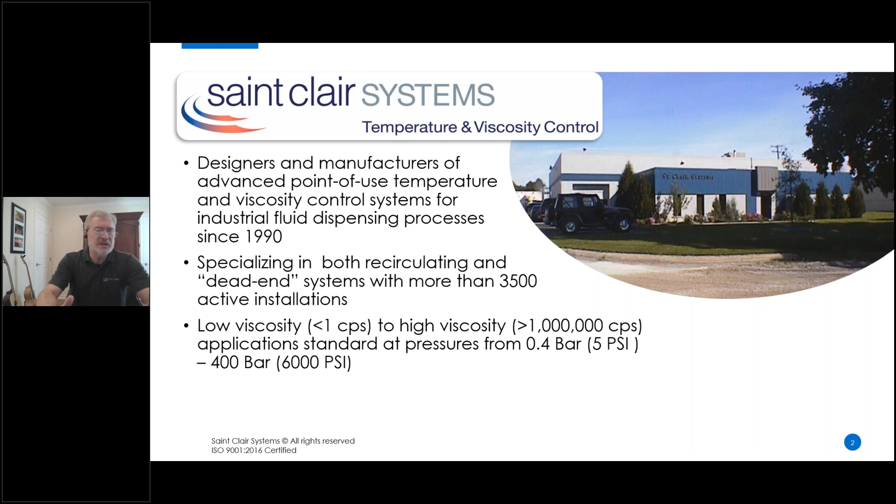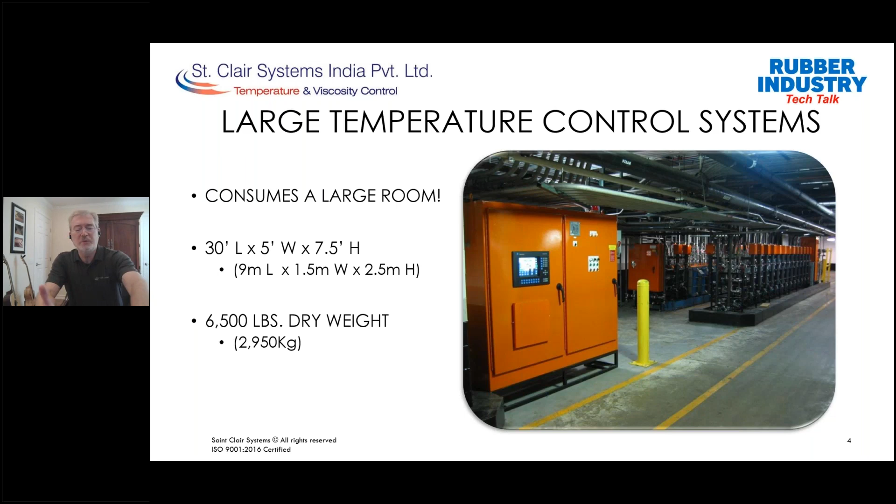We build all different kinds of systems. We build systems that consume a large room, okay? In this instance, these will be over 9 meters long and weigh more than 3,000 kilograms and cost upwards of $500,000.

And those are the big systems, but we also build smaller systems as well. This is a thermoelectric unit. It can sit on a tabletop. It is basically 40 centimeters square, and it weighs less than 15 kilograms and costs less than $5,000. So it's a vast variety of different systems for virtually every application, regardless of size.

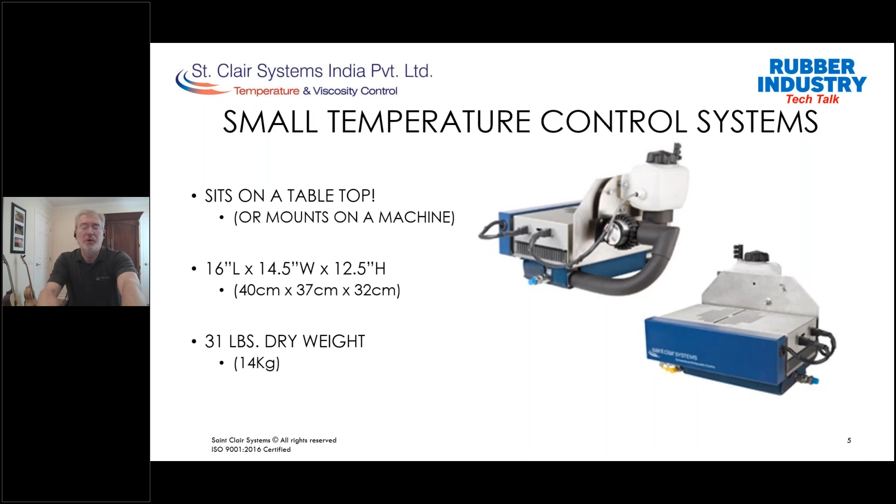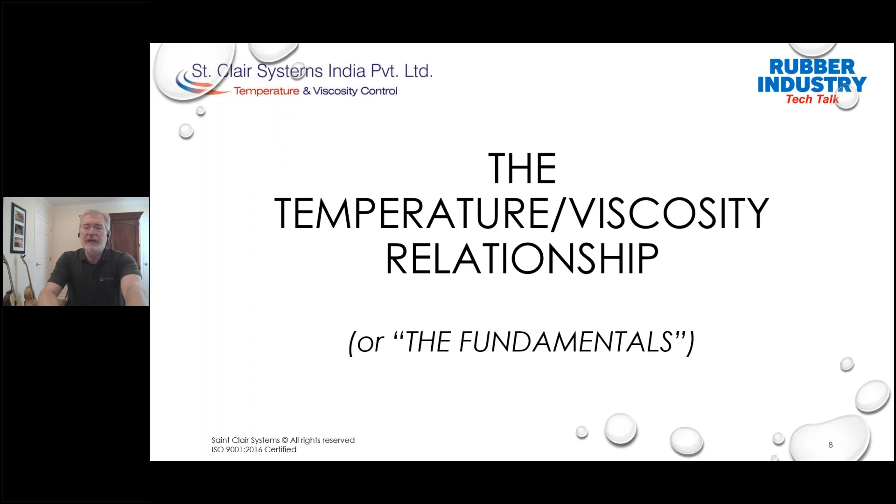So let's jump into the topic for today, enough of the introductions. We're going to start by talking about the temperature viscosity relationship. This is the fundamentals behind what's going on, and these are the things that create issues in dispensing systems in the first place.

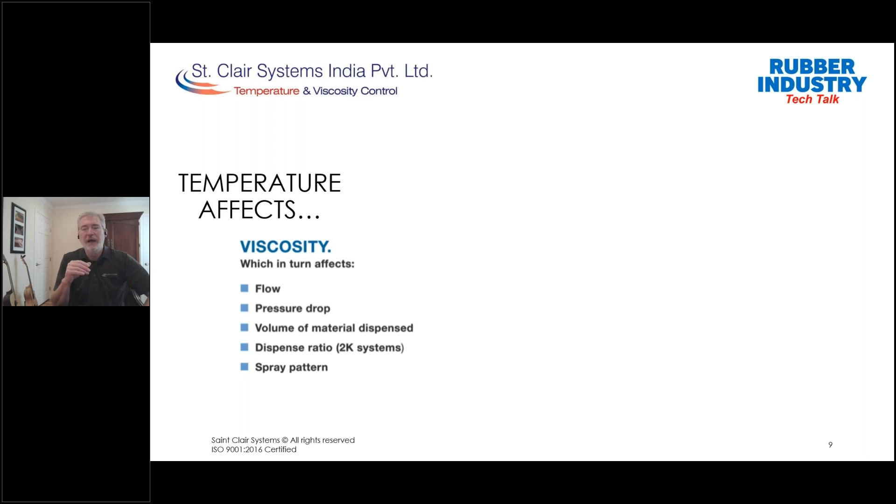So that begs the question, what is viscosity anyway? And it's a really good place to start our discussion. I like this explanation because it's simple: the property of resistance to flow in a fluid or semi-fluid. Now, we all understand that water is a consummate definition of a fluid, but what's a semi-fluid?

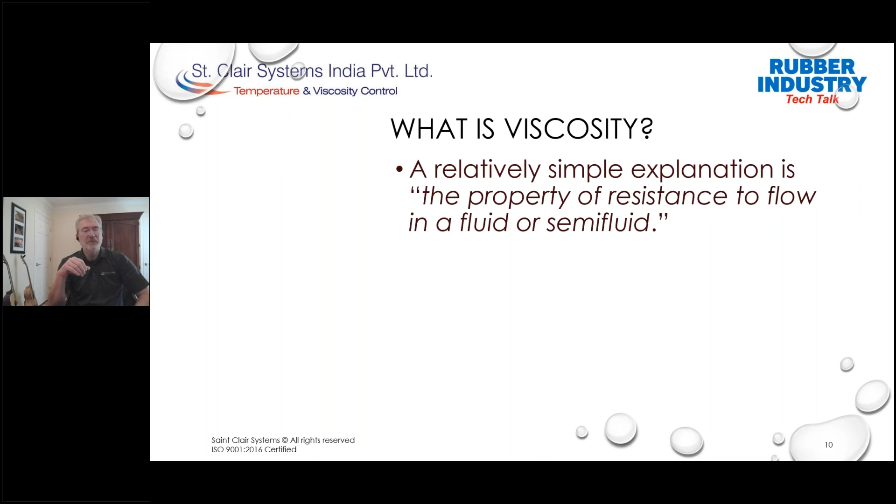Because you're all in the industry, you probably have a lot of things popping into your head that are specific to your particular process. But I'm going to pick something a little more general, something that you maybe didn't think of: honey. Think of honey if you place it in the refrigerator. It gets thick, really thick, almost solid. But if you take that honey out of the refrigerator and place it out in the hot sun, it starts to warm, and as it warms, it thins out significantly, and soon you can pour it, almost like water. Now, the change in how it flows represents its change in viscosity. And in this case, like we'll discuss all day long today, the cause of the change in viscosity is the change in temperature.

Here we see the viscosity versus temperature curve for Parker-Lord's Chemlok 220, a common solvent-borne bonding agent, measured in St. Clair Systems India's lab. It's the typical curve we're all familiar with - viscosity falling as temperature increases - and though it looks like a linear relationship with a slope of about 0.9 seconds per degree C...

If we apply an exponential trend line, it reveals that, just like with most modern coatings, this is actually an exponential curve.

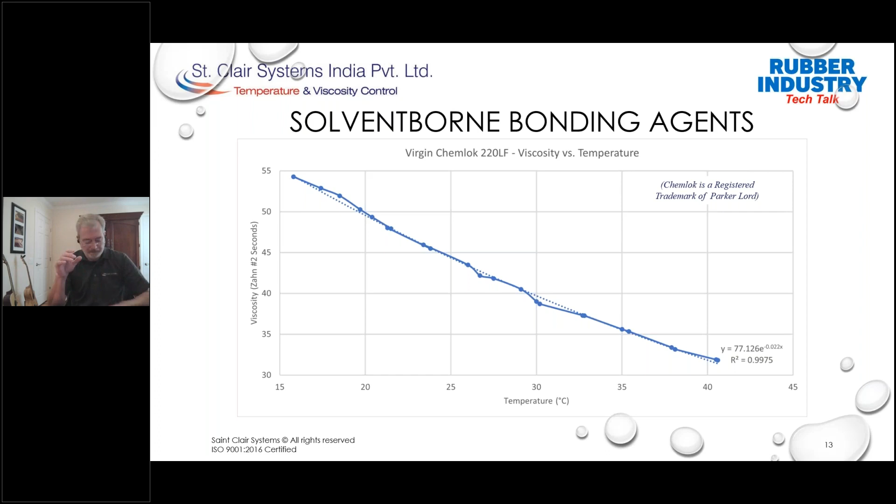So this is a really important finer point about the compound and its usage.

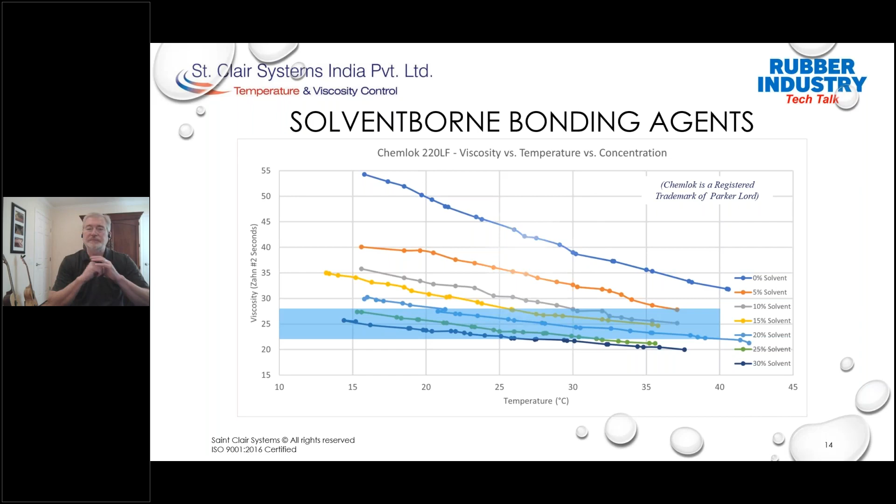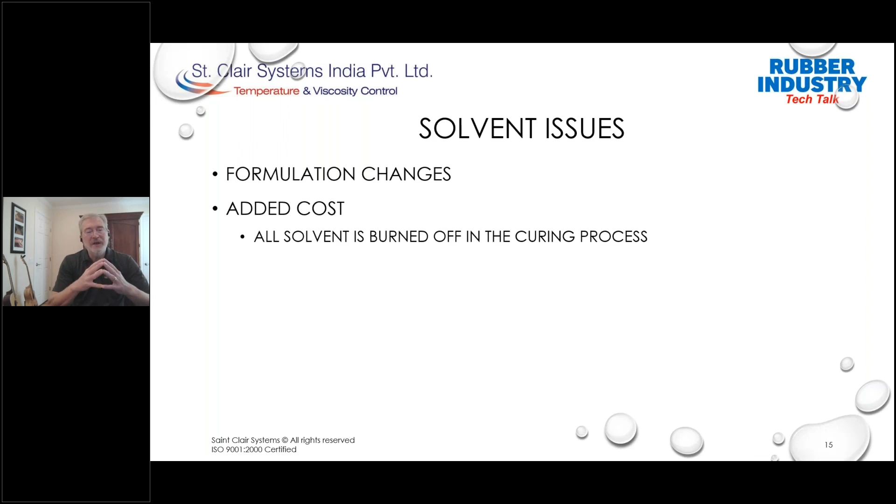But what many people don't think about is that adding solvent alters that carefully developed coating formulation that Parker Lord worked so hard to create, and the solvent creates many issues within the application process. First, it represents excess cost because every drop of added solvent has to be driven off in the oven during the curing process, and in addition to environmental concerns, it also represents a risk to our operators.

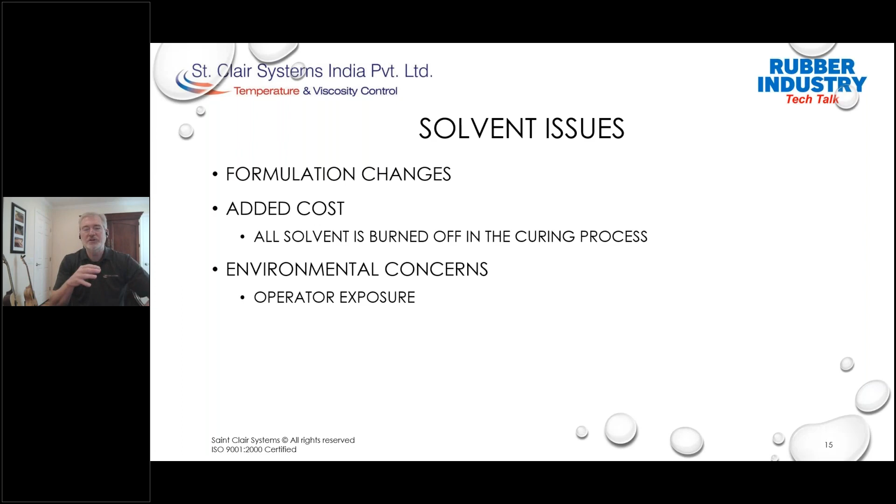To make matters worse, too little or too much solvent can cause defects, and we can plot these defects on a continuum. If we have too little solvent, we get dry spray and all of the associated issues with adhesion and other issues you're used to - uneven coatings, etc.

If we add a little more solvent, we reach the optimal point at which we should be using the product to get the optimal performance level. But if we continue to add solvent, we begin to get issues with cure, which, as we add more and more solvent, can progress into problems with adhesion and blistering, and as we add even more, solvent pop. This is why the temperature factor is so important.

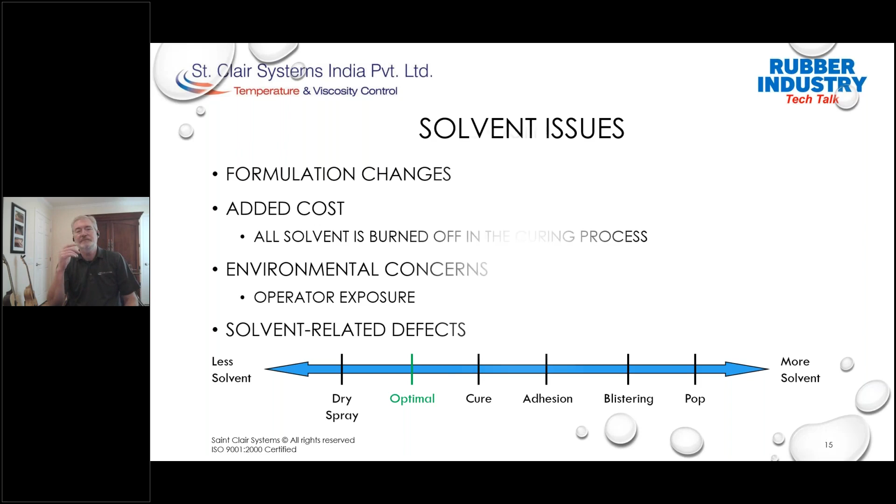It's important to understand the impact of viscosity in our process. Proper coating viscosity is key to successful product outcomes. Yet even in today's modern applications, we usually make one viscosity adjustment, and it comes at the beginning of the process, usually by adding solvent - and we generally ignore the impact of temperature on our process outcomes.

There are a lot of factors in our environment and process that affect temperature - things like ambient temperature, which is the first thing you think about. What's the ambient in the room? But there's also the coating storage temperature. What temperature did you store it at? Did you store it outside in the hot sun, or inside where it's cooler?

What's the volume of the source container? That's important because it's a thermal mass, and it takes a long time for a thermal mass to change temperature.

Then there's the rate at which the coating flows in our process, and if we're recirculating it, it's the rate of recirculation. And what's the path of the recirculation? Does it go up through the truss level and down to our dispensing station, or does it flow maybe under the floor in a basement area where it's cooler?

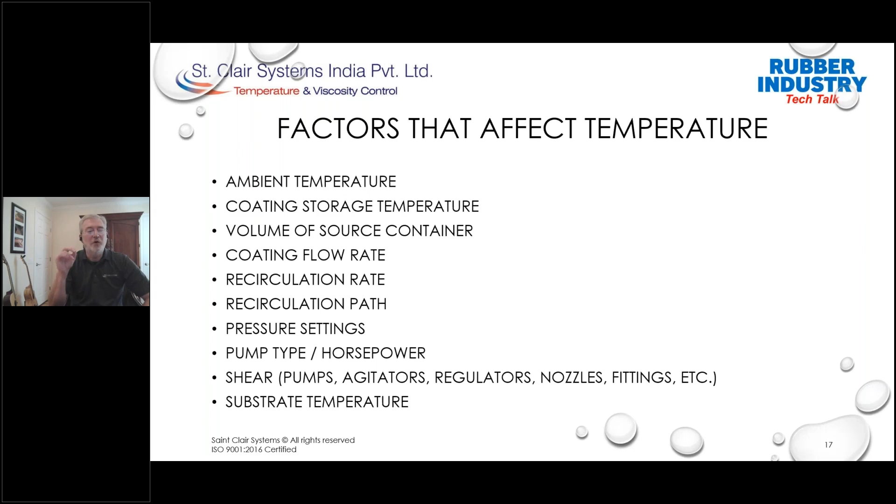So how do all of these temperature influences affect the film formation? If we're going to discuss film, we need to start with the perfect film. If the viscosity can be controlled and the system set up such that atomization, deposition, and film build are even across the part, the cure will also be even and the result significantly more predictable.

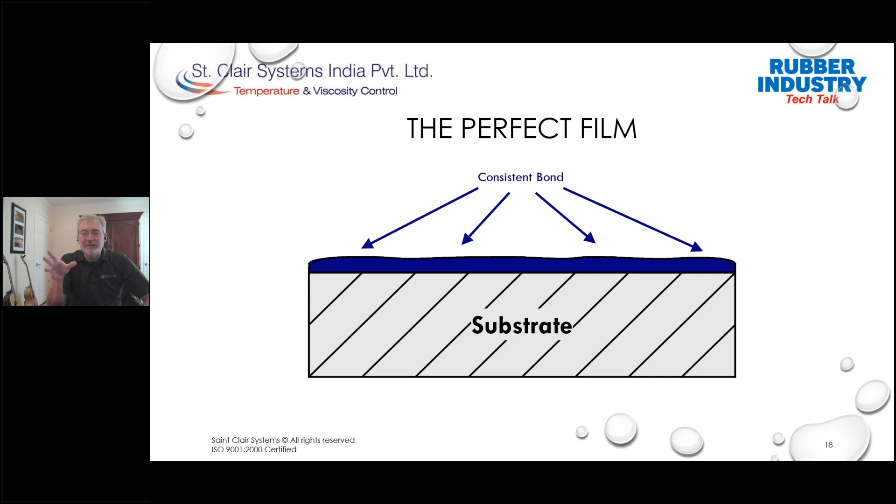This more consistent surface will also produce a better bond. Not only will the bond be stronger, but the layer will also be significantly stronger as well.

But creating the perfect film requires perfect conditions, and more often than not, conditions are not perfect. As we've already seen, if the fluid temperature is wrong, it will affect atomization, spray pattern, flow out, etc. The result is an uneven film across the surface of the part, as we've demonstrated here.

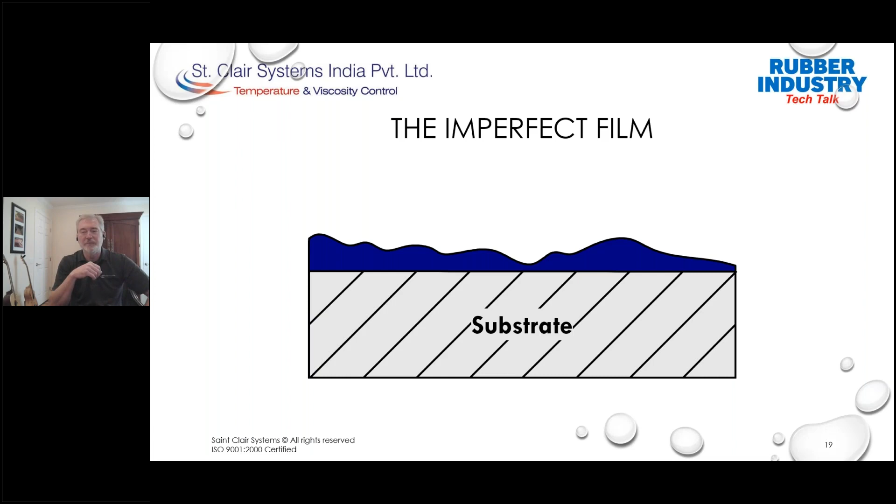This can have a significant impact on our film cure. As we can see, the thinner film areas are going to cure more rapidly than the thicker film areas, and that makes perfect sense. The uneven surface will also have a negative impact on our bond performance.

It's also possible to create blisters from solvent entrapment under the cured surface of the coating. As it cures, the solvent gets trapped and blisters form as that solvent tries to evaporate up through that sealed surface. And this has a negative impact on bond performance in the Chemlok layer itself.

Now, to make matters worse, if these thinner film areas that we're looking at are within coating spec, the thicker film areas represent excess coating. And when we apply excess coating, we're adding to our costs. So that's really important.

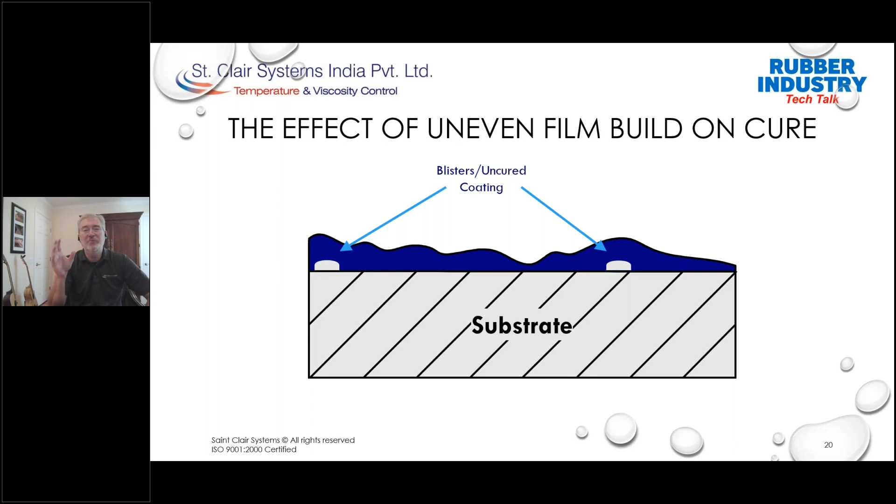Now, these things all add up to create defects, okay? And what defects do we attribute with these temperature-induced changes in the Chemlok and primer viscosity? They're all the same ones that you're used to. First, there's the interlayer failures. These are the result of poor bonding between the substrate and the primer, and the Chemlok and the rubber itself. So there's three different transitions there where these failures can occur.

Then there's the intralayer failures. These are often called cohesion failures, and these are the failures that happen within the layers themselves. These are all caused by temperature-based viscosity variations that manifest themselves as variations in film.

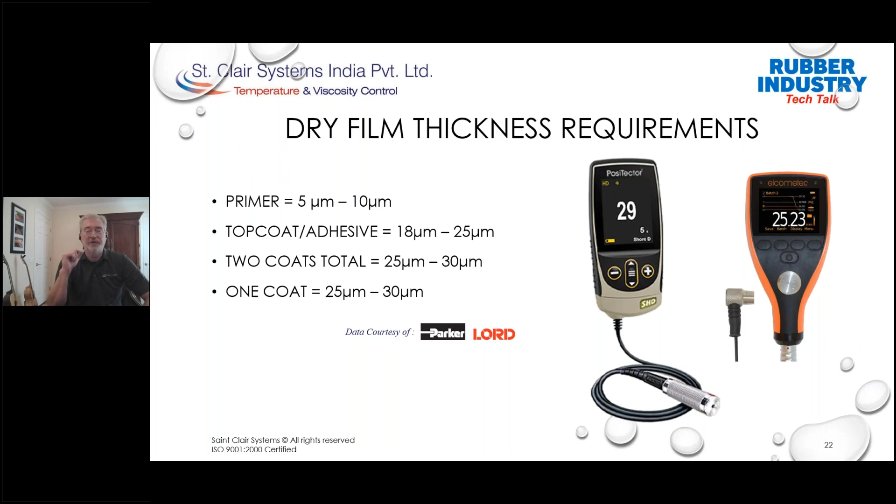So let's return to our film build example here, and we can see that we have a film thickness range between 25 and 30 microns, okay? And the areas below that 25 microns, as shown here, will have insufficient film. And it's hard for our rubber to actually get down into those cracks and crevices. So it creates a bonding issue, okay? This is our interlayer bond issue.

Conversely, the areas where we're looking at too much film being applied, okay, this is above the 30 micron range, and this compromises the strength of the layer itself. This is where we get our intralayer failures, where the failure actually occurs within the Chemlok layer itself, not at the bond line.

So our goal must be to stabilize and optimize the viscosity of the coating material at the point of use, which in spraying systems is the nozzle orifice. Now, in order to get a predictable film repeatedly, no other material temperature in the system matters as much to the outcome of the coating process. So how do we manage that?

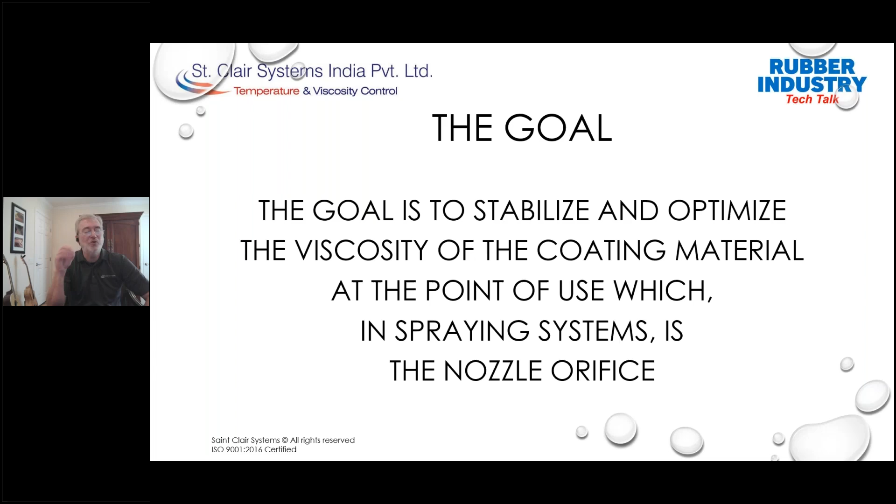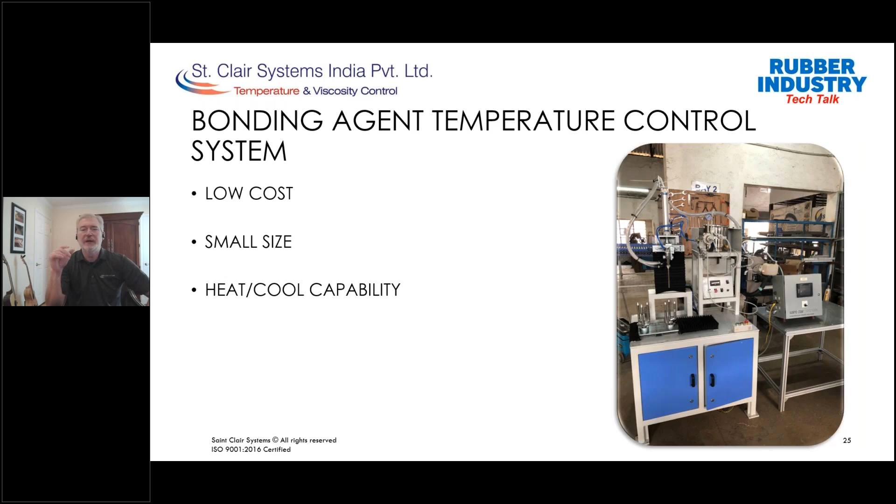It's got a low power consumption, which makes it economical to operate on a production basis, and it utilizes our recoilable coax hose technology to carry the temperature control all the way to the gun to establish point of application control. And that's very important to maintaining consistency through our manufacturing process, from day to day, morning to night, season to season, and importantly, from batch to batch.

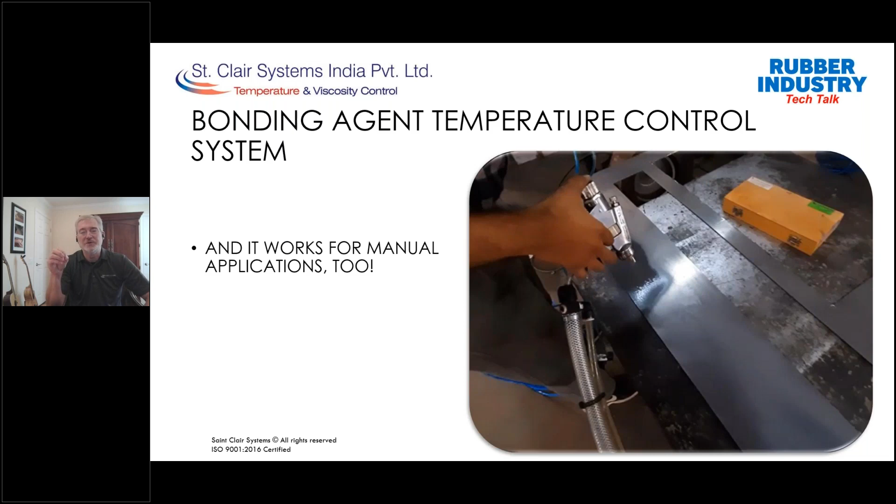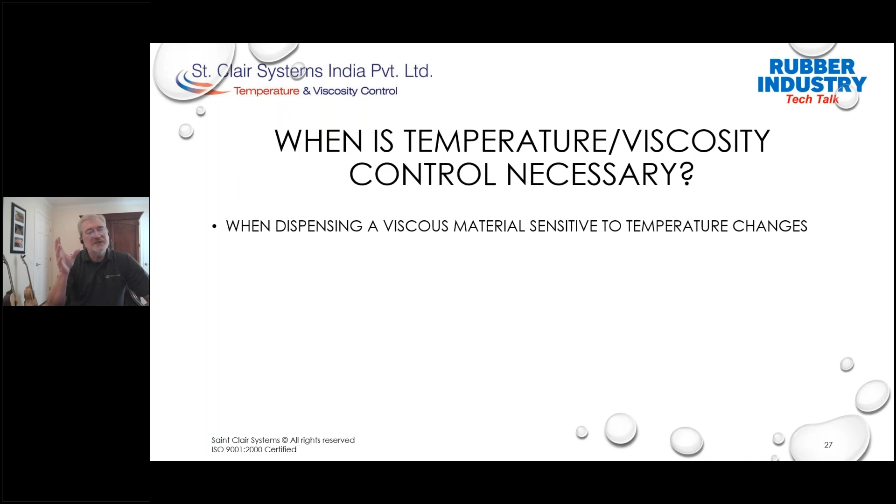So, when is temperature and viscosity control necessary? Well, when you're dispensing a viscous material that's sensitive to temperature changes. When manual, automated, or robotic equipment is being used. When repeatable results are not just desired, but required. When quality requirements are high. And so in short, always.

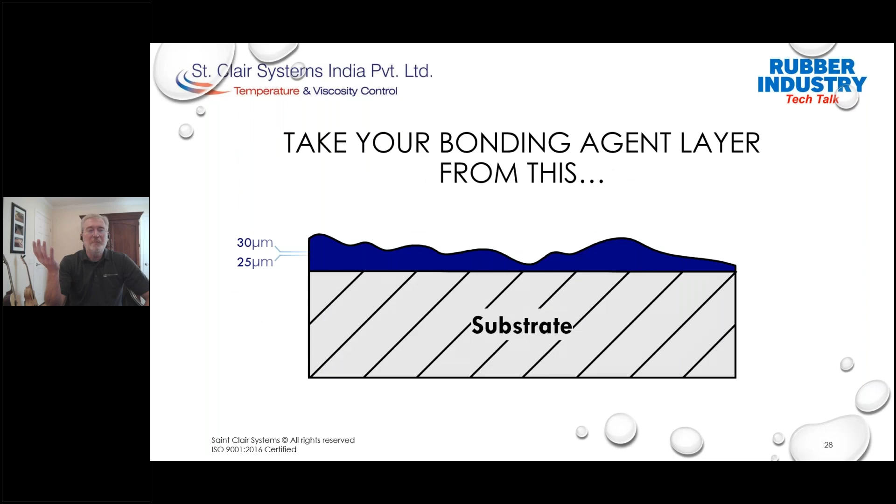What we stress is that you take your bonding layer from this to this. And the benefits are obvious. You get improved quality, increased first pass yield, reduced bonding agent usage, reduced primer usage, reduced solvent usage. So that adds up to cost savings.

But that's extended because you also get reduced rework costs and reduced scrap costs. And best of all, for your relationship with your customer, reduced warranty costs. And then to help our planet, you get reduced environmental impact. And to benefit your operators and their families, you get reduced operator exposure.

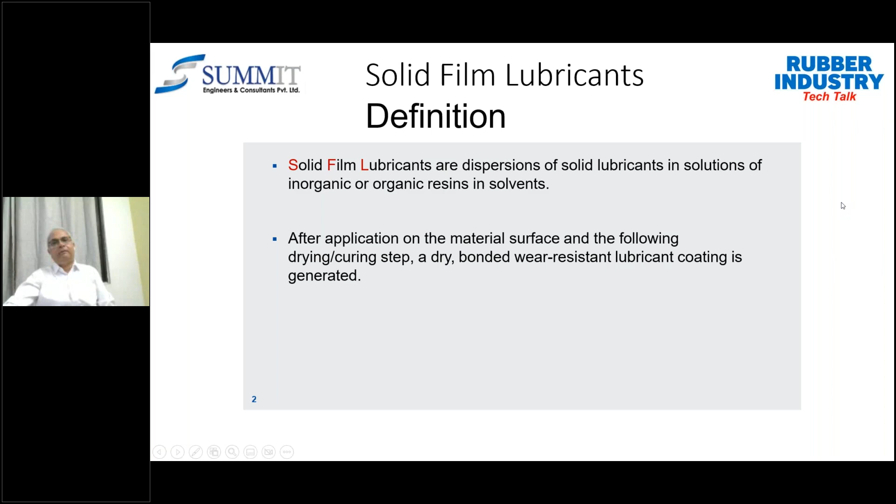As I mentioned, applications in the automotive industry are one of the very important and prominently used areas - wiper, motor bushings, steering columns, exhaust hangers, suspension bushings, and whatnot. The more you look into that, elastomer seals is the most important and prominently used application where this dry film lubrication is being used.

A simple question: why does one have to do the lubrication? Maybe somebody would be saying, okay, I want to use it for maintaining for a longer period, or during the assembly part of it - it should be able to do the appropriate type of assembly forces requirements and all. So many more facets are there for which one has to think of that.

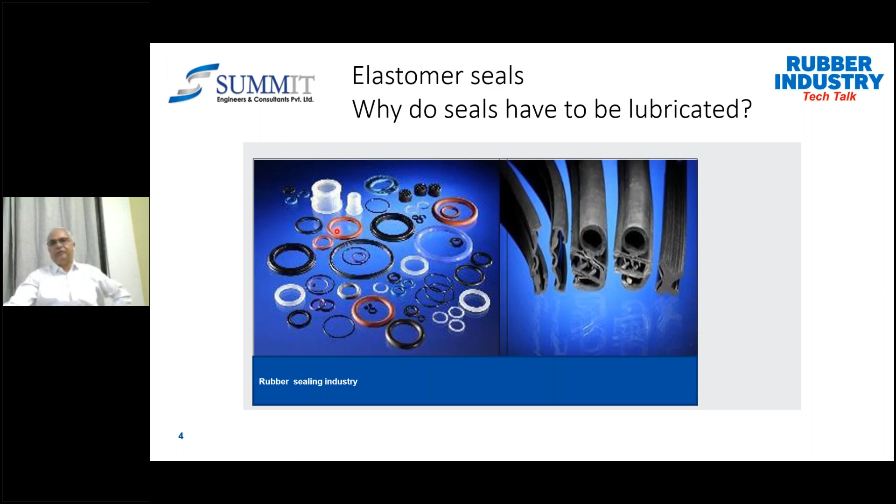So obviously, for any solid film lubricants, the main task is the dry lubrication - to reduce the friction and wear. This is a very important perspective.

Lubrication under extreme conditions - you can find it especially when you are assembling oil seals or O-rings onto the shafts. This is a very tricky method one has to adopt in the absence of any kind of dry lubricants. Or you'll have to apply oil or grease. The moment you use oil or grease, you're going to get a problem of contamination onto that, and cleaning and other processes are going to get added into that.

Lubrication in areas where oil or grease are not suitable - many times our rubber material is not capable or suitable for oil applications or grease applications. In such cases, what to do? You do not have any other option but to go for solid film lubricants. Some customers are using talcum powder or dry powders during the assembly part of it, but that also has environmental issues related to that.

Obviously, running-in optimization, emergency lubrication in combination with oil or grease - this is a very important perspective, especially when you look into seals, oil seals, or piston seals which are being used in cylinders. It could be pneumatic cylinders or hydraulic cylinders, where you have oil-assisted application, and then it can be a fantastic solution with better life and better results for you.

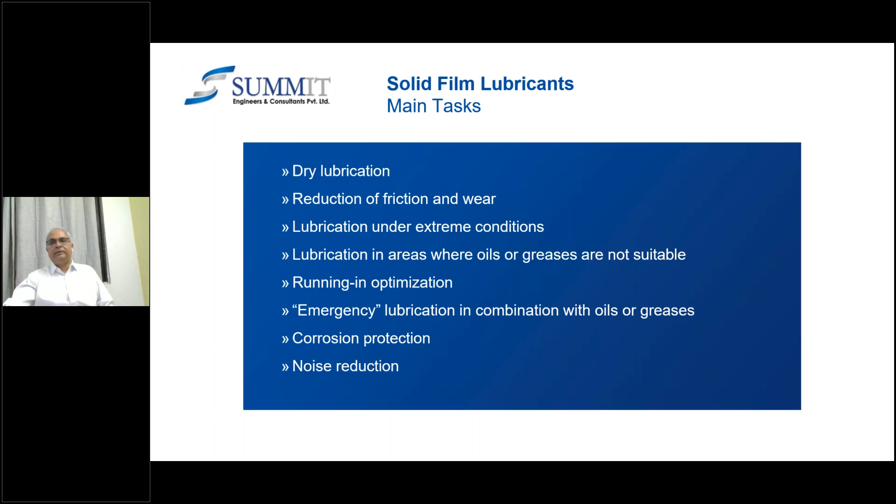As I mentioned, now not only restricted to automotive, many customers are insisting to go for threaded fasteners or screws with dry film lubricants. Obviously elastomer is one important aspect of it - lifetime lubrication, assembly, running-in, and noise reduction. So obviously all these parameters are being utilized very effectively in day-to-day automotive applications.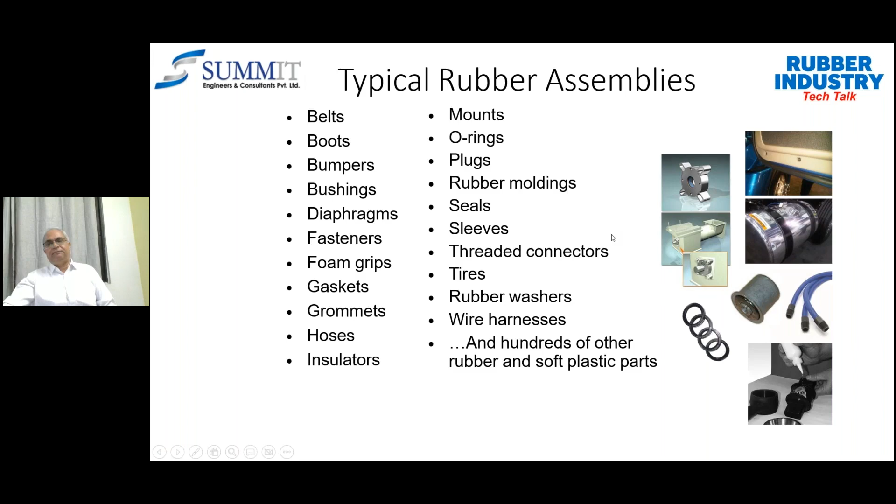For example, now somebody is also talking about e-vehicles, e-mobility, and that's where belts are obviously a very important perspective. Some customers are now talking about coating belts with specialty coatings - boots, bumpers, bushings, diaphragms - so many applications, enormous applications which we will be able to see when it comes to the level of dry film lubrications.

And why not - this is one of the very important aspects one has to define, especially looking at the benefits of these coatings. It is ultra thin and lightweight coating, excellent moisture, chemical, and solvent barriers. It does not have much impact on that. This is an excellent dielectric property it has got - superior thermal stability, excellent ultraviolet stability, excellent crevice and multi-layer penetration, minimal mass addition.

These are making dry film lubrication the most popular and the most expected technology in the field of today's automotive or rubber industries.

So usually all these dry film lubricants are fluoropolymers. So what is this fluoropolymer coating actually? This could be one of the simple questions one must be having in mind. Basically, fluoropolymer is a polymer that is based in fluorocarbon and has...

The fluoropolymer is a chemical compound that contains many strong carbon-fluoride bonds. The property of polymer is that it does not bond easily with other materials - this is very important.

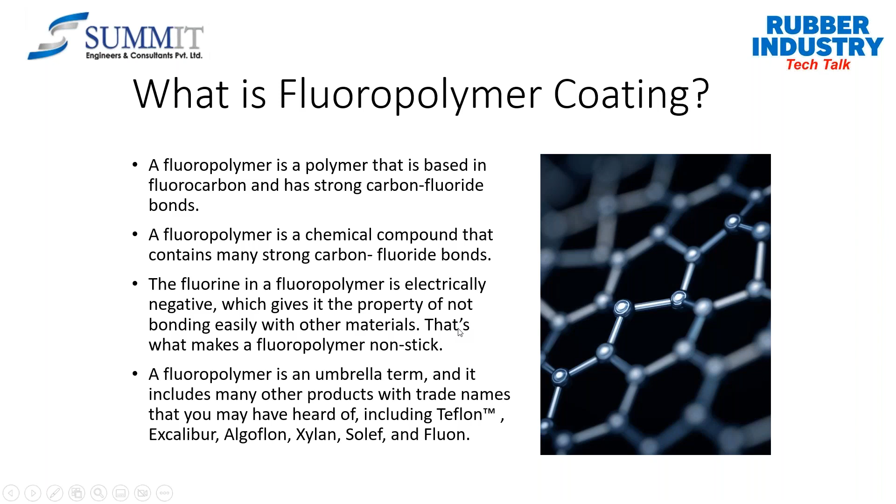That's what makes the fluoropolymer non-stick. And when you go into rubber or metal, this important perspective one has to keep in mind. It includes many other products and trade names could be Xylan, Algoflon, Excalibur, Solef, Fluon, or PTFE kind of things which have been used in the industry.

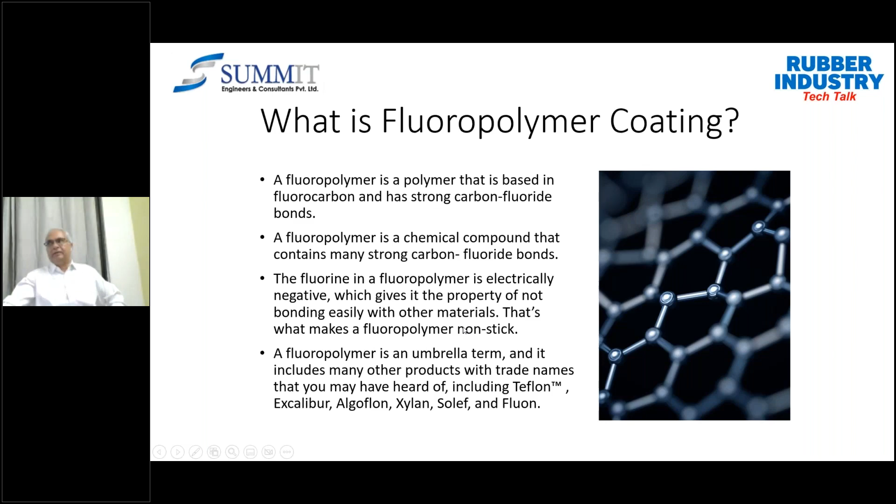So for lubrication of rubber material, conventional methods are also good - I'm not saying bad, but they have very low friction values. It has got very low friction values and high wear protection.

Interactions with the rubber material is another big question for you. Many rubbers are susceptible to oils and greases, so an application on the single components can create some effective utilization of this process. But the aging process is very fast for conventional lubrication. Whereas solid film lubrication coatings are dry and touch proof - you will not be able to feel that it has been lubricated. But the compatibility with the rubber material is very easy and very effective.

Mass part application is very much possible, unlike the oil application or the grease application with reference to conventional O-rings. This is one of the best and advantageous processes, especially when we are talking about cycle reduction in the assembly times.

The long time storage of the coated parts - the most important feature is the life. Solid film lubricated parts can have a shelf life of up to 2 years or more than that.

The low friction value is less than 0.04, with limited use in dynamic applications. When I say limited use in dynamic application, it is without the assistance of oil. With the help of oil or lubricated materials, this is very effective and has been used nowadays in applications like brake cylinders, wheel cylinders, hydraulic cylinders, and pneumatic cylinders.

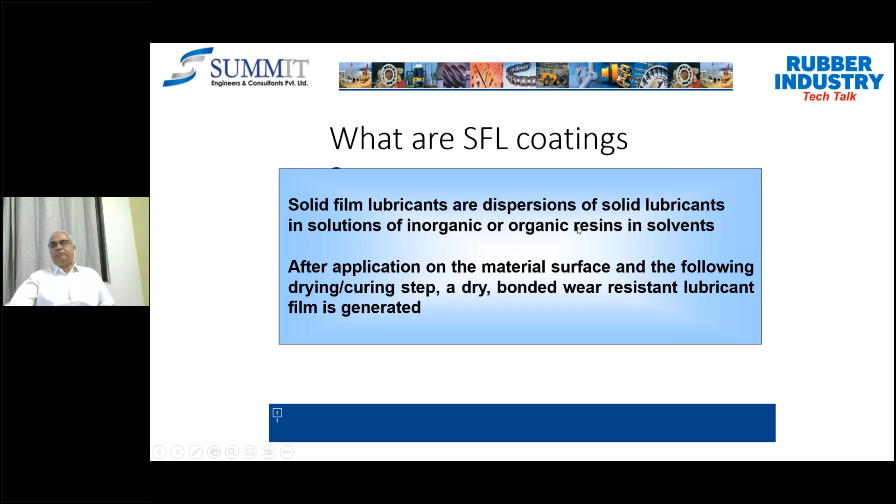Nowadays, most of the time people are talking about the sustainable process, and to make it more sustainable, we should try to use the appropriate type of material. There are three main solid lubricants: molybdenum disulfide, PTFE, and graphite. These are the three major solid lubricants used in industrial applications, and not only industrial, but also food, pharmaceutical, and food grade industries.

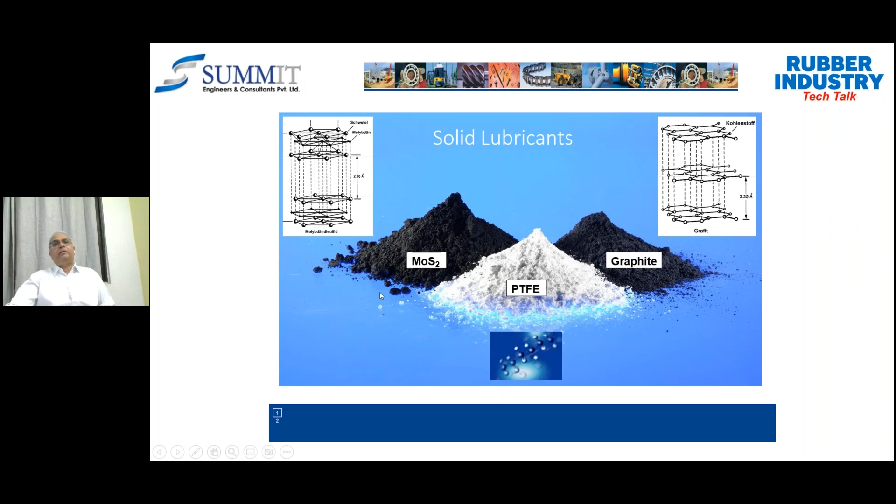If you compare molybdenum disulfide, graphite, and PTFE in terms of mechanical properties, strength, and chemical properties - as far as strength is concerned, all three are equally good, as far as load carrying capacity is concerned. But molybdenum disulfide has one of the highest load carrying capacities, which makes it more suitable for aeronautical applications, especially for metallic components which can be coated more effectively with molybdenum.

Low friction, good adhesion behavior which can be overcoated - these are certain advantages. But at the same time it has a disadvantage like higher friction values at low pressure and distinctive running-in behavior. Obviously, all the time it is going to be black color - you cannot add any kind of pigment into this, and that's one disadvantage. While you try to make it nowadays, when the RoHS ecosystems are there, you cannot be able to make it over there.

Graphite is another important material which has fantastic temperature resistance - it can go up to 600 degrees centigrade, with conductive behavior, which makes it more suitable for engine components, especially when you want components related to engines. For example, pistons are being coated with graphite, but it has got a weakness as well.

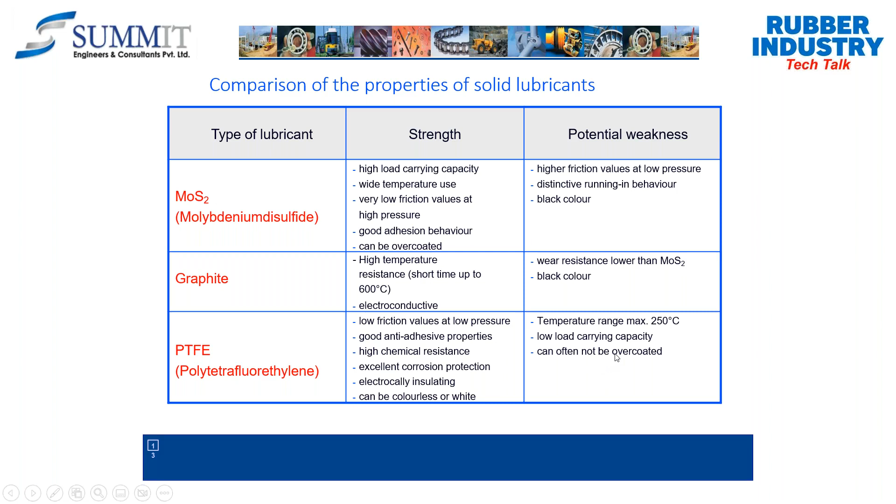So if we make the color coding for the o-rings, then it could be very easy for you to identify them.

This will give a brief explanation of how solid film lubrication actually behaves. Whenever the substrate is applied with this solid film lubrication, the phosphated material, the material will go inside the binders, the color pigments, and the phosphated layer will be covered in the form of solid lubricants. Now, whenever it is applied with another material or the operating surface, this operating surface will be in a position to get itself applied onto the surface, and that will be uniform. On the right hand side, you can find the typical behavior or photograph from scanning electron microscope - before application, and immediately after application with the solid film lubrication when the surface is applied. So this typical type of behavior happens during the coating application.

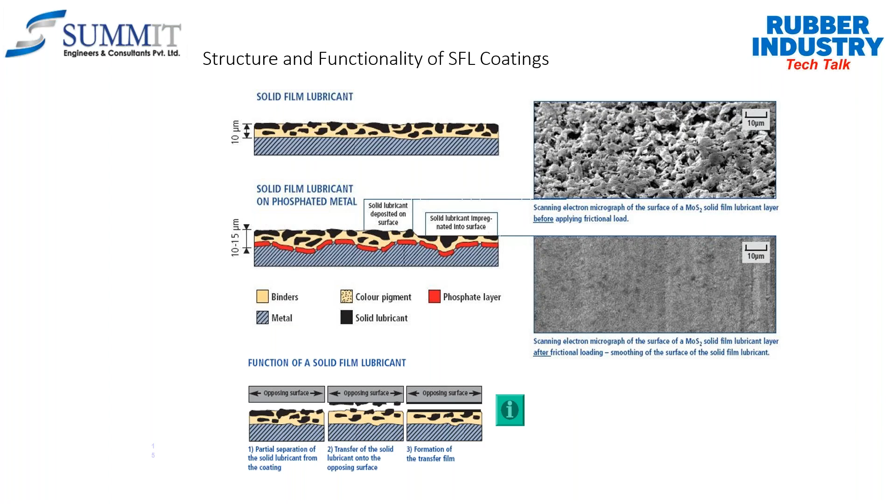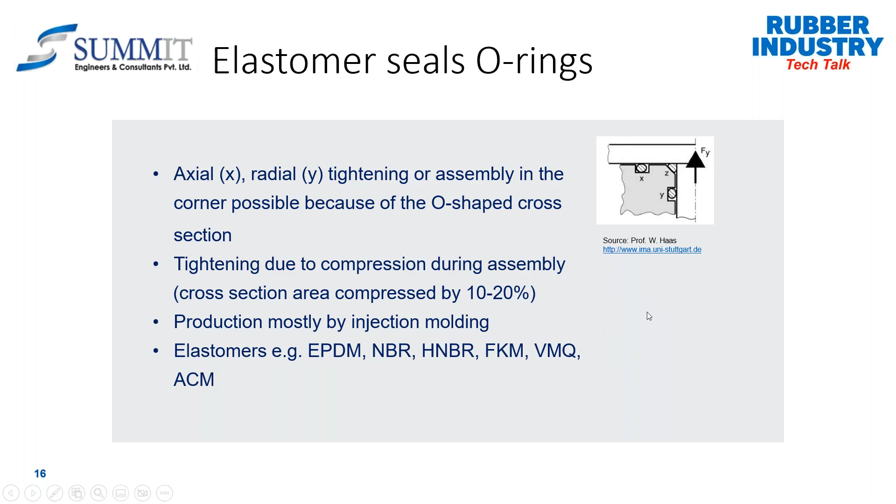The most important parameter is the elastomer. Now I would like to go to the application point of view - oil seals or O-rings. The O-rings are very important. Normally they are made of EPDM, NBR, or FKM, among many other materials which are manufactured with injection molding or compression molding processes. Usually 10 to 20% of the cross-section is compressed for the application when you insert it. Now you can imagine the forces required for that will be enormous, and that creates difficulty for you in doing the application.

There are certain pros and cons of the different elastomers. NBR has good resistance to oil and fuel, but poor resistance to aromatic and polar solvents. EPDM has good resistance to heat, hot water, and polar solvents, whereas poor resistance to mineral oil and fuel. FKM has very good resistance to heat and chemicals, but poor resistance to hot water and polar solvents. So if you look at the positives and negatives, as a manufacturer, FKM is normally a very expensive material. If you want to achieve the certain desired qualities of FKM rubber, you can instead use EPDM or NBR rubber, and by doing the coating you will be able to achieve the desired properties of the O-rings.

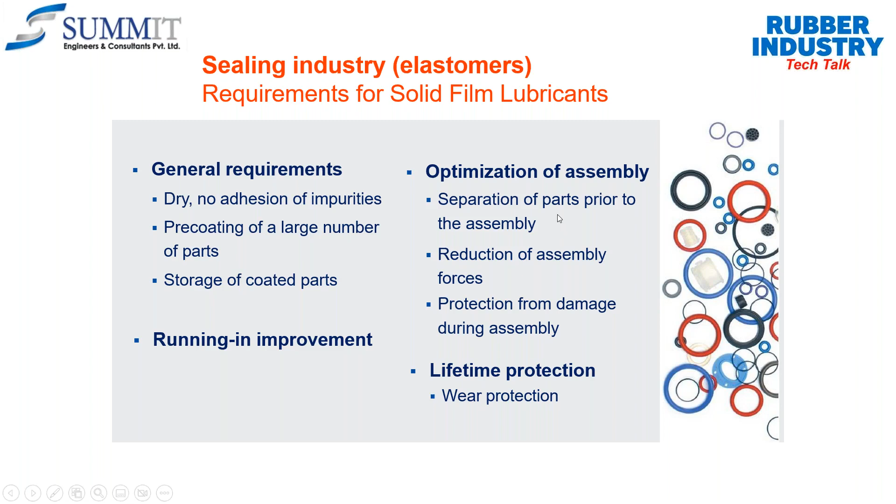This is one example I'm giving. The sealing industries require solid lubricants for dry or no adhesion of impurities. Pre-coating of a large number of parts at a time should be possible. Storage of coated parts, running-in improvement should be there. Optimization of the assembly, wherein we should be able to have the Poka-yoke system, reduction of the assembly force, protection from damage, and separation of parts prior to that - that's the Poka-yoke system we've been talking about - and the lifetime protection, the wear protection.

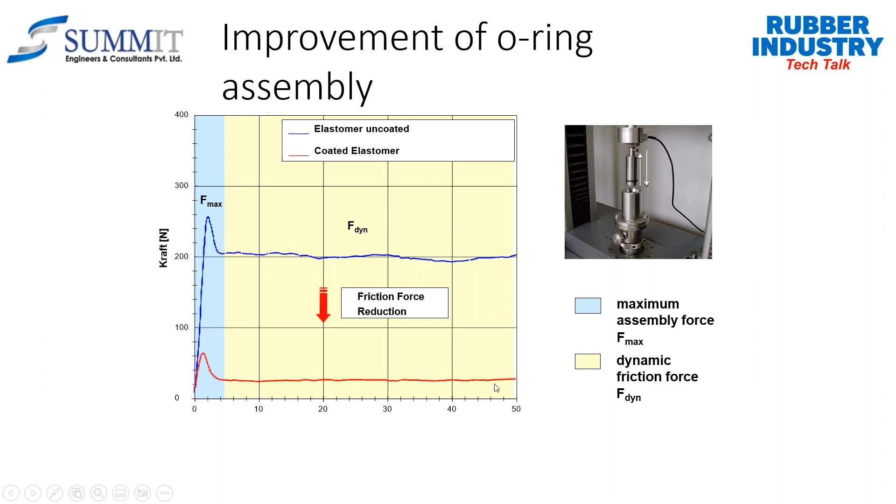We have taken certain examples here, where we've applied both an uncoated O-ring and a coated O-ring. If you look at the blue graph, it shows a maximum force of about 250 Newton approximately, which is required for insertion of the oil O-ring into the shaft. Whereas with the PTFE coated O-ring, you can find less than 50 Newton force, which very well demonstrates that the friction force has been reduced.

Obviously, the increase of abrasion resistance. These are all the experimentation and tests which have been showing, just to get you a brief idea about the benefits we are going to derive over here.

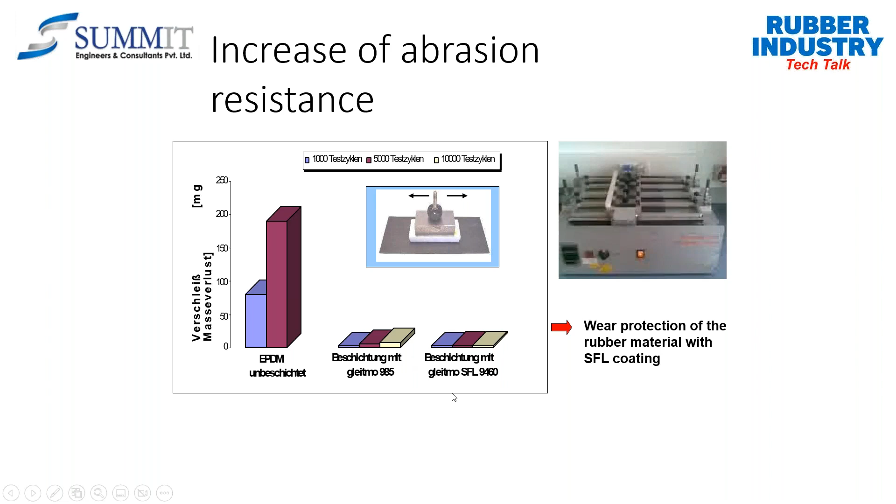In the sealing industries, you'll be able to find O-rings for connectors, O-rings for solar cells, O-rings for thermostats, O-rings for phase sensors, especially for automotive oil sensors - so many other applications where this PTFE coating or dry film lubricated coating is being applied.

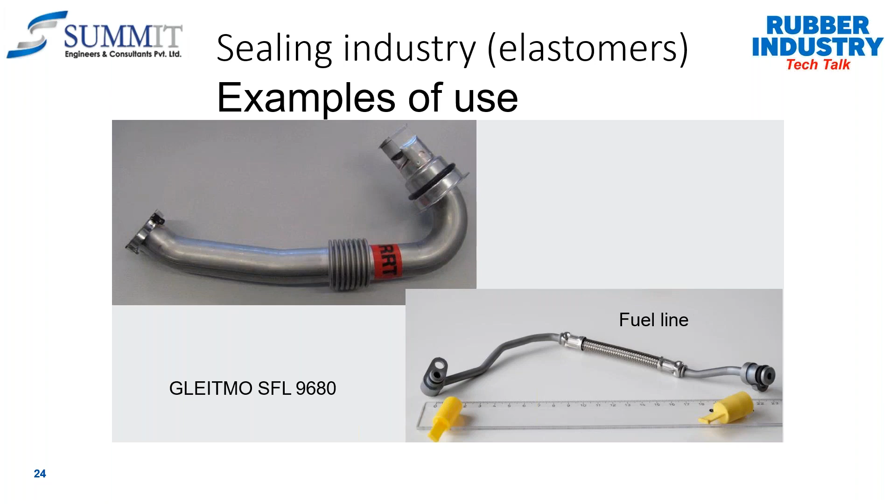In the sealing industry, you can see fuel lines where this same material has been used and the life has been extended to a larger extent. Air injection manifolds, air intake pipes, where assembly becomes very critical, and many times the failure of the O-ring happens during assembly itself, which can be avoided very effectively by using PTFE coated or dry film lubricated O-rings.

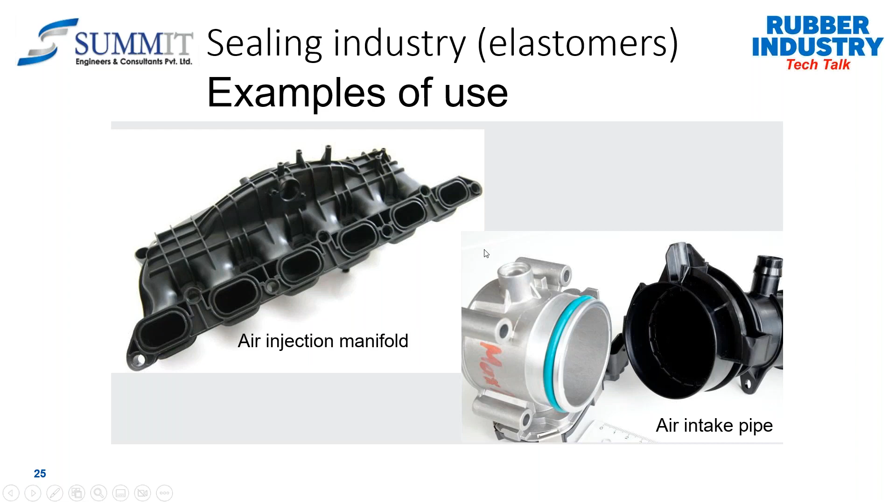Normally these dry film lubricant coated O-rings are called PTFE coating or molybdenum disulfide coating, which has been used in the industries. These are some of the examples I'm giving. Probably one or two of your components could have such requirements, and you should be able to think of adopting this particular technology.

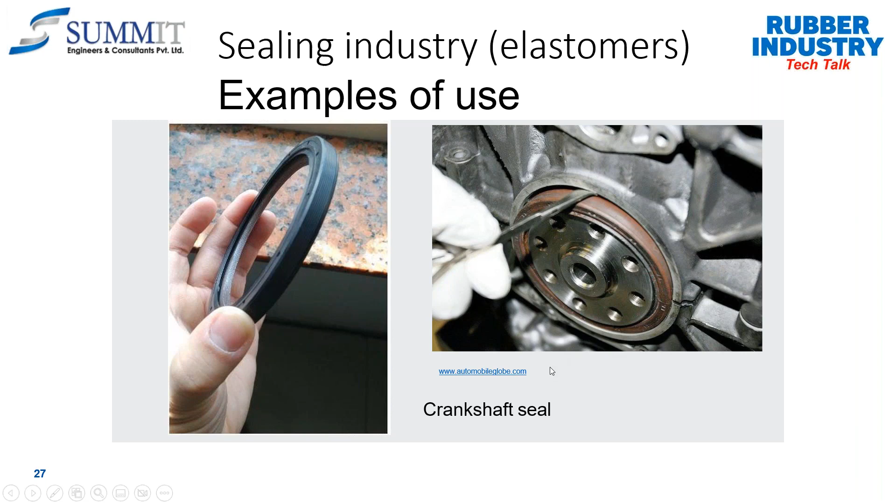Then the crankshaft seals - this is a very critical and important component, very difficult to do the assembly part of it. If this is coated with PTFE or dry film lubricant, the assembly becomes much easier. Some customers have experienced the assembly time has reduced to the tune of 10% as compared to the conventional crankshaft seal fitment.

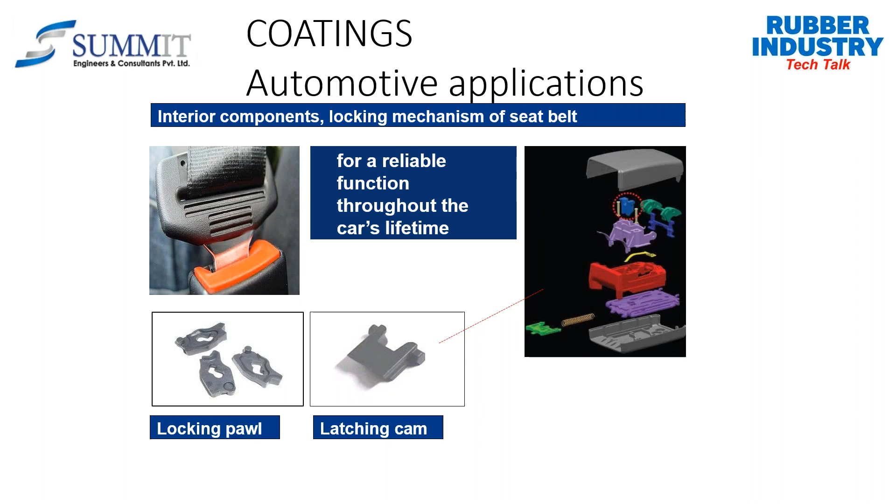Obviously these plug and seal connectors which are being used, then automotive seat applications, locking, latching cams - so many components used in the industry are utilized nowadays with dry film lubricants. So what is the coating process? We have just understood the general PTFE coating and all.

This is very important to understand. Just like for any other conventional adhesive coating application, the cleaning or pre-treatment is very important in this dry film lubrication coating as well. Then the coating application, drying, and quality control - just like any other coating process, this is also going to be useful. The same process will be adopted here.

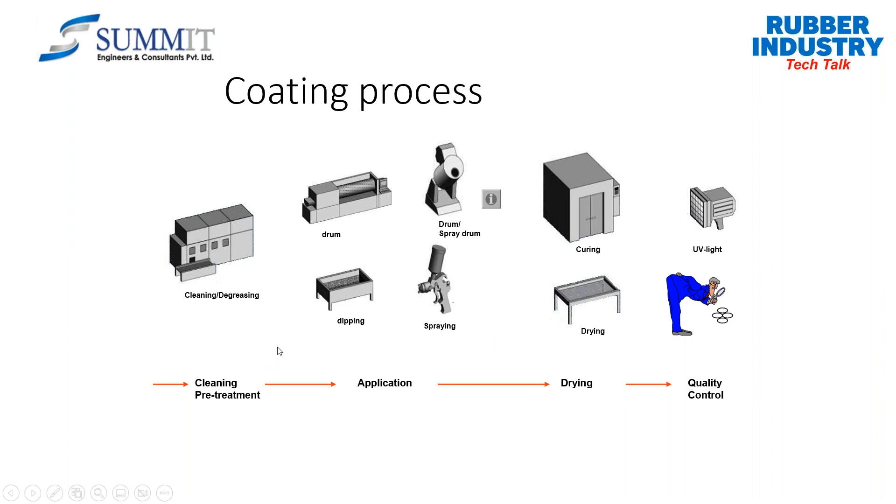Now the surface cleanliness is a very important perspective for dry film lubricants. In reality, a material to be bonded will arrive with a surface that has been contaminated. This can include dust, oil, grease, fingerprints, or any other debris capable of winding up on a surface. Especially for rubber or metal, whatever type of components you're considering, it is required to be pre-treated. The surface cleanliness, the cleaning could be just by way of hot water, conventional water rinsing, or soap alkaline cleaning. A variety of processes are there actually.

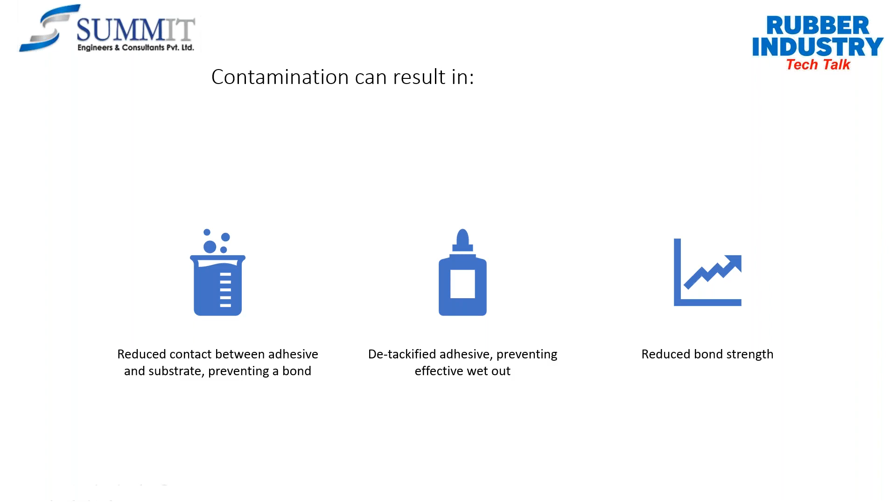And this particular contamination, if by chance it is available, can result in reduced contact between the adhesive and the substrate, preventing the bond failure - or the proper bond will not be happening. The de-tackified adhesive prevents effective wet out and reduces bond strength. So all such things can be avoided by utilizing effective wet out.

One more aspect of this is the surface energy, especially for rubbers. Normally rubbers or engineering plastics have a lesser surface energy. By doing the cleanliness, by adopting the cleaning process, we are able to increase that surface energy as well. But apart from that, there are a few more components, especially certain rubbers, which have very low surface energy, for which one has to go for plasma treatment. And plasma treatment is very expensive, but this is much needed.

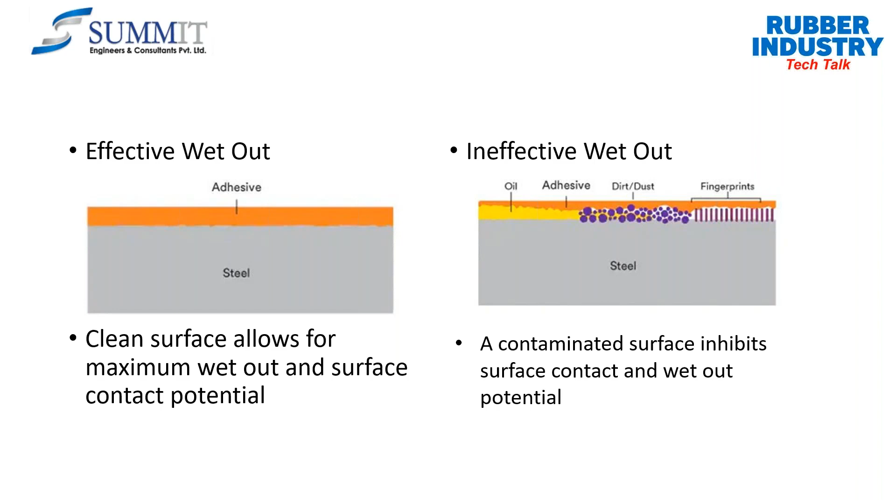Alternatively, one has to go for the primer coating onto the material for that. The application processes are a different process. It could be the dip coating, the drum dip coating, or the spray drum. But every coating system has got different limitations.

Mostly nowadays people are using the spray drum coating for this kind of application, because of the advantages: mass production is possible, one drum itself can handle adjustable coating thickness. The coating thickness ranging from 4 microns to 20 microns is possible to achieve in drum coating application, with homogeneous coatings. It is most suitable for most of the SFL coatings, and color O-ring coating is also possible.

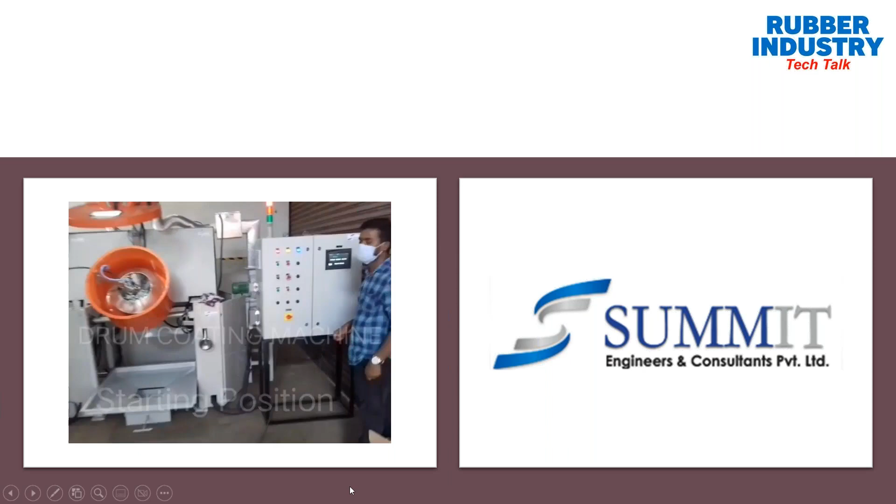This is just one example of the operation part of it. You'll be able to see here how quickly one will be able to do the coating. This is the fully automatic machine, being used by a single person.

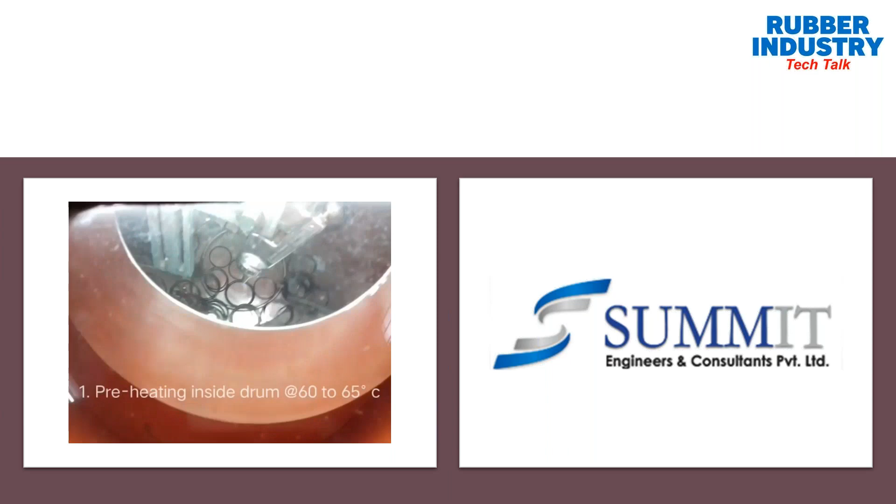Normally preheating, then the coating application, drying, in a sequential manner - this can be done here. By doing this, we are also ensuring the appropriate air circulation system within the system.

In the cyclic manner: preheating, by which you are removing the water content from the components, then the application of the coat, and again drying. So if you want more coating thickness, then the required coat application or spray application will be more - the number of cycles will be more.

And the loading and unloading becomes much easier without any intervention by the operator, which results in components ready to use being available for you.

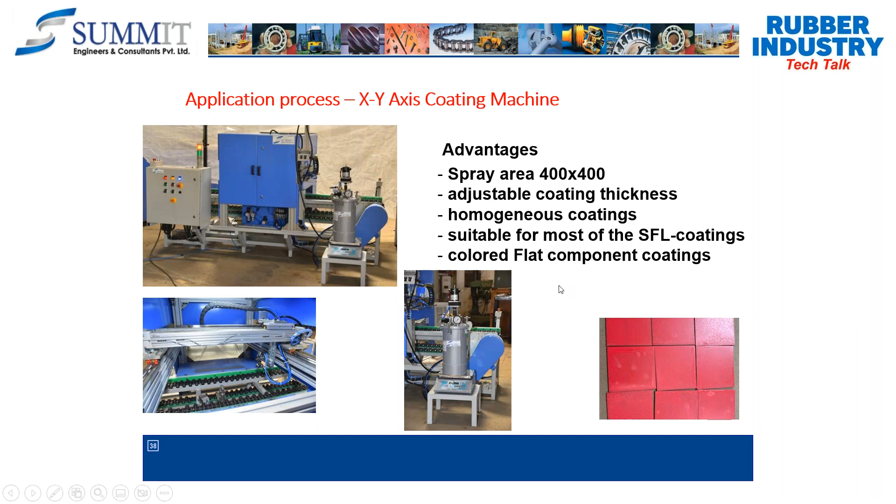We have got another solution for that - usually people are using the XY axis coating machine, which we call a robotic coating machine, wherein a variety of components can be coated in that spray area. Again, you will have adjustable coating thickness, homogeneous coating is possible, and coating of color flat components will be possible to achieve here.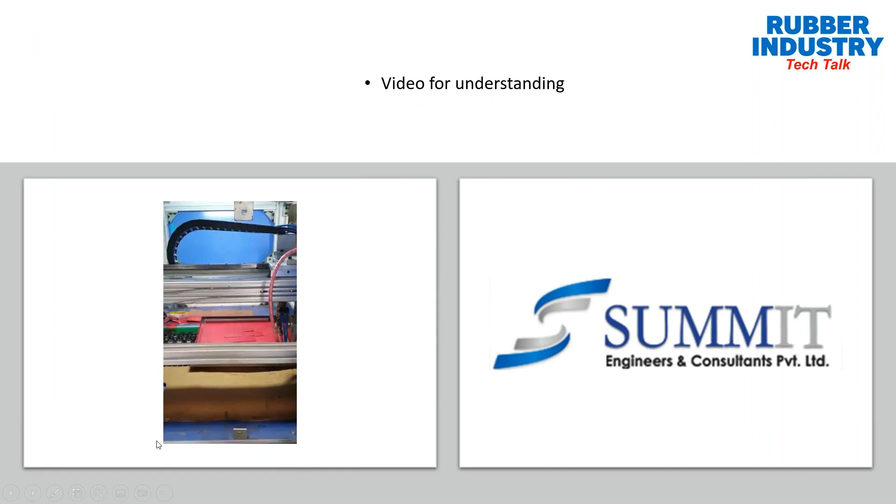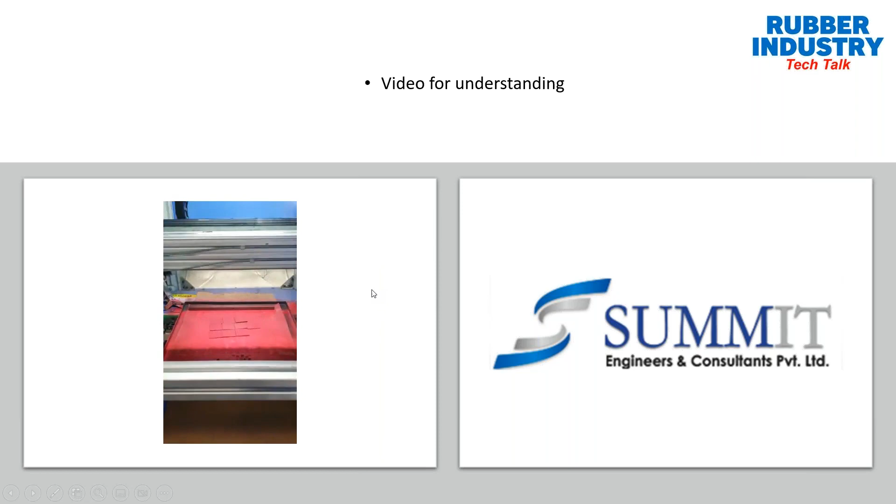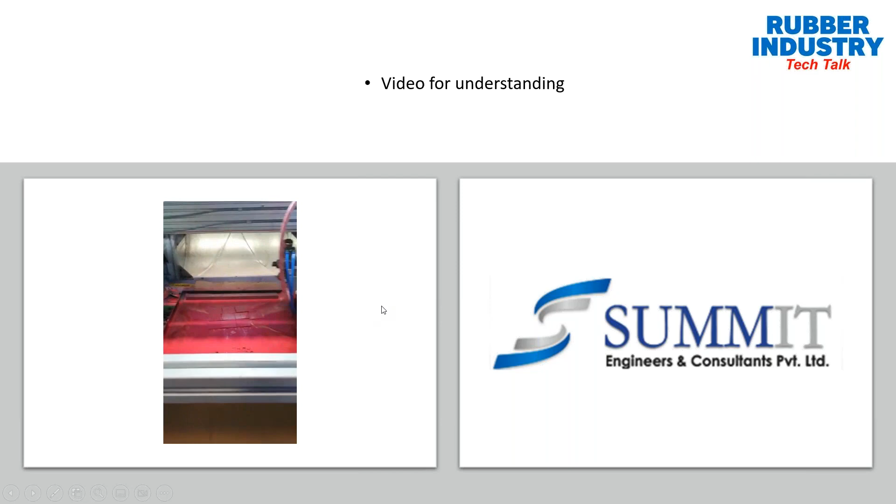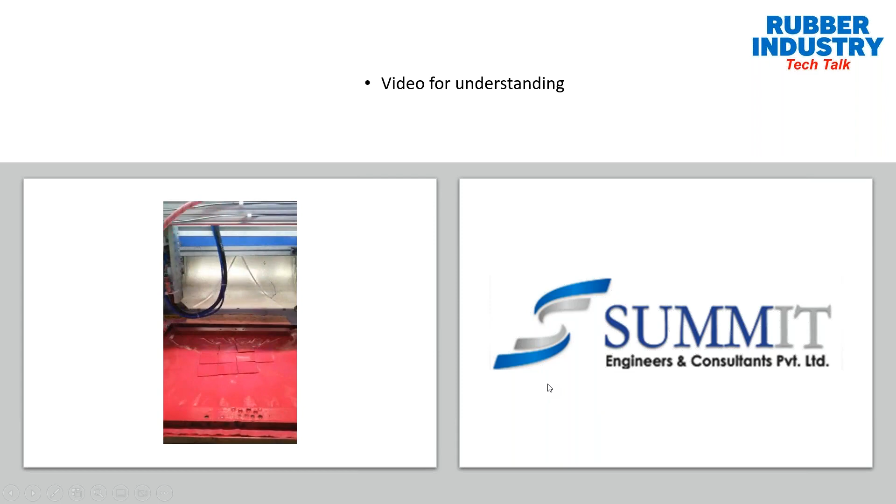Here you will see the basic parameters for the gun are fixed, but the angle and the nozzle diameter are very important for the spray coating applications. While choosing an appropriate application method, if you're going for spray application, you must choose the right nozzle diameter for the spray gun. Obviously, a variety of guns are available in the market, and you should utilize proper knowledge and the MSDS or application data sheets from manufacturers before choosing the appropriate type of gun.

Obviously, the coating thickness - when I say you are able to get 4 to 20 micron coating thickness uniformly - is possible, and this coating thickness is a function of the coating speed and the flow of the liquid or coating material being utilized. So when you choose the appropriate parameters, you should decide these factors and then go for the application part of it.

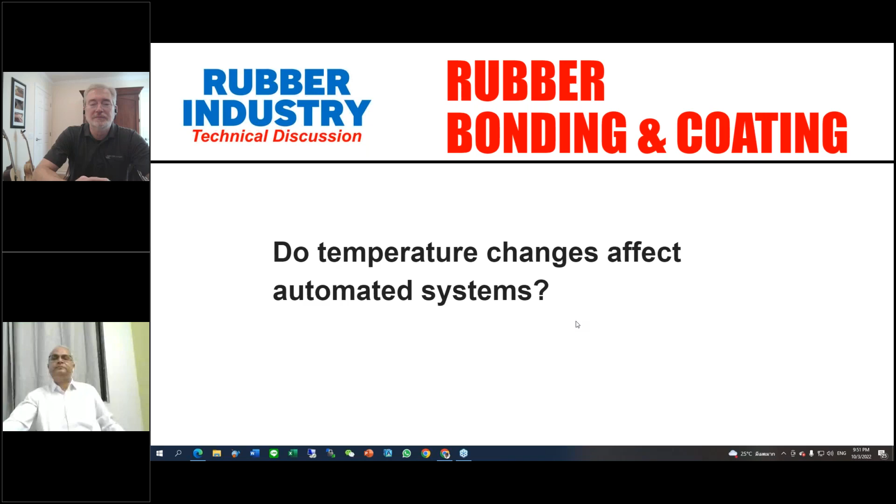This is a great question. Do I have to change my formulation to apply automatically? The answer is no, not necessarily.

But that being said, if you're bringing in, say, the Chemlok 220 and adding solvent to it, whether you're adding 30% or 35% will change the viscosity of the fluid. So while you can use the same formulation, many of our customers find it advantageous to have the solvent added at the supplier when the fluid is formulated, so it comes in ready to use. That way there are no adjustments and no measurement errors introduced into the process. The material always comes in the same way from the supplier, giving an added level of consistency. So do you have to change your formulation? No, you don't, but you may choose to change where your solvent is added so that your formulation is more consistent.

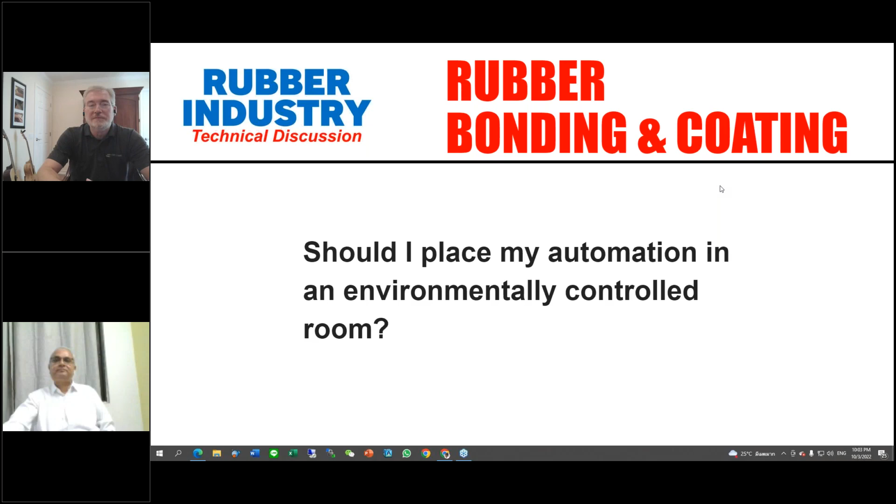That is a much more difficult control. There you have to control the pot, and that can be done. That is clearly an option. There are many ways to do that. Manual application by brush or sponge is difficult to get a good, even film deposition. This is the reason that people go to automation in the first place, and that's about the only way that you're going to get good, consistent thickness.

Spraying is a much more controlled process than brushing or sponging, and it's also much easier to automate, though it is possible to use a brush coat or a sponge coat where the application is controlled by rotation speeds and things like that. So there are ways of doing that, and it's clearly an option to automate. But if doing it as a manual process, your only real option is to control the temperature of the fluid you're dipping into. There's a lot of variation or variables to consider, but clearly you'll get improvement when you automate.

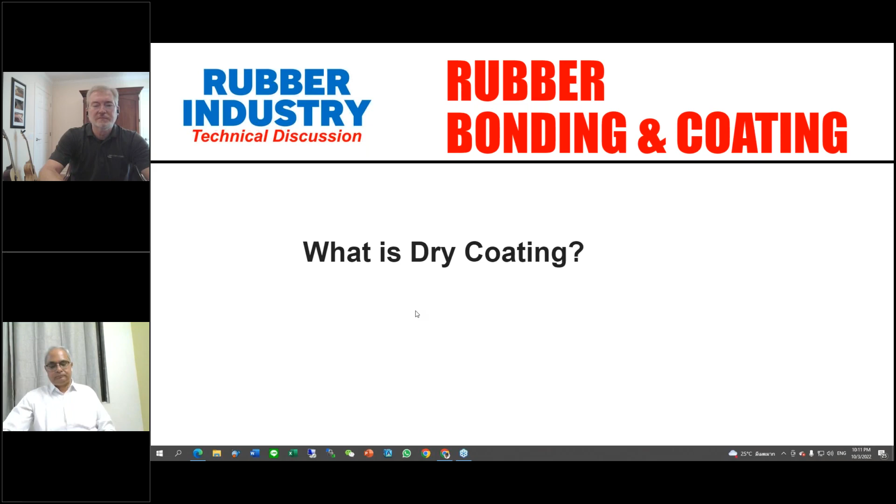Many times people ask what type of material and what type of manufacturers are there. As far as I know, since this entire process was built up by European and American industries, most manufacturers are from there, like 3M or Lord's. Lord's also has this particular type of material. Then from the European side, you've got Fuchs, Xylan, right? Such manufacturers - the basic principle remains the same.

The combination of the solid powder or solid lubricant, then the binders, added with solvent or water - depending upon that, the fluid will be available for you, and which can be applied.

There are many more ways of doing this dry lubrication, wherein spray lubrications are also available - just like spray bottles which are readily available, and by applying it can be used. But those are very expensive, and need to be utilized only in the specific area where another component, like your O-rings or oil seals, is being fitted.

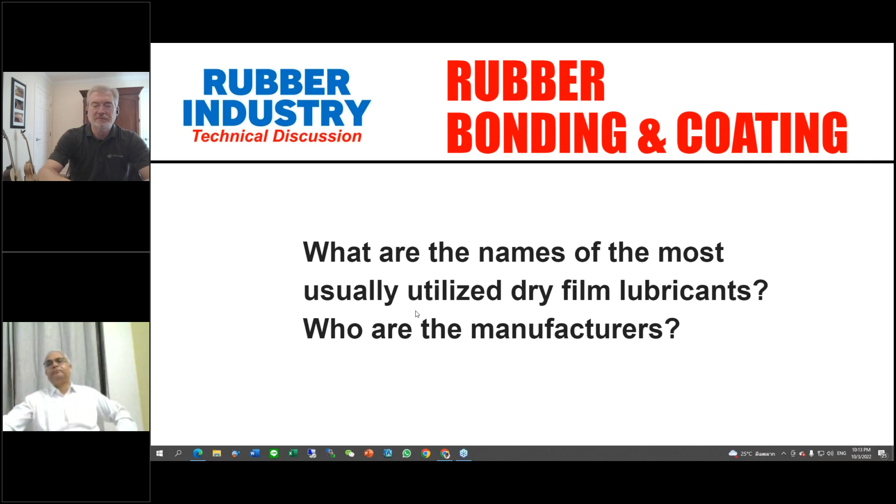The general characteristics are very important, actually, as we have been talking about - there are different characteristics. Just before answering this particular one, I was answering the question prior to this.

Apart from force requirement or wear resistance, you should also identify characteristics like temperature sustainability, chemical resistance or chemical composition, oil resistance, and such things. Especially for molybdenum disulfide - if you do not require colored components and such, you can utilize molybdenum disulfide. Even solvents need to be used for very heavy load applications - one has to go for solvent-based dry film lubricants. But normally for rubber applications or rubber components, water is utilized, and that is the most acceptable methodology used in the industries.

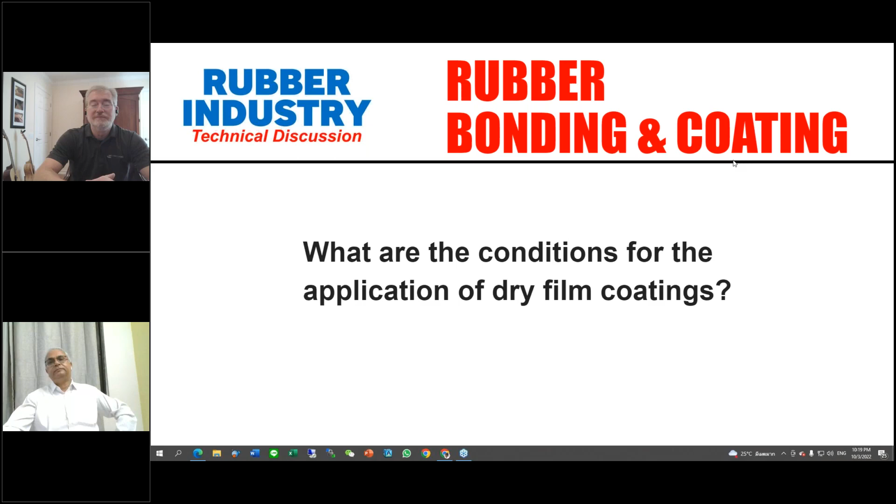PTFE, yeah, that's Teflon. PTFE, polytetrafluoroethylene, is the chemical name for Teflon. We all understand Teflon as being very resistant to chemicals and a very good lubricant. It's used for everything from stopping foods from sticking to your cookware, to greasing the axle of your car and maintaining a good slippery surface. It's a common replacement for silicone, so from a lubrication and durability standpoint, it is an outstanding lubricant.

Absolutely. You probably know this, or maybe not, but this particular product was evolved in the lab by accident. In America, scientists were working with some materials, and the chemical combination that came out was suddenly found to have fantastic wear properties, fantastic temperature resistance, and such qualities. This happened by accident, and it was then termed and named PTFE.

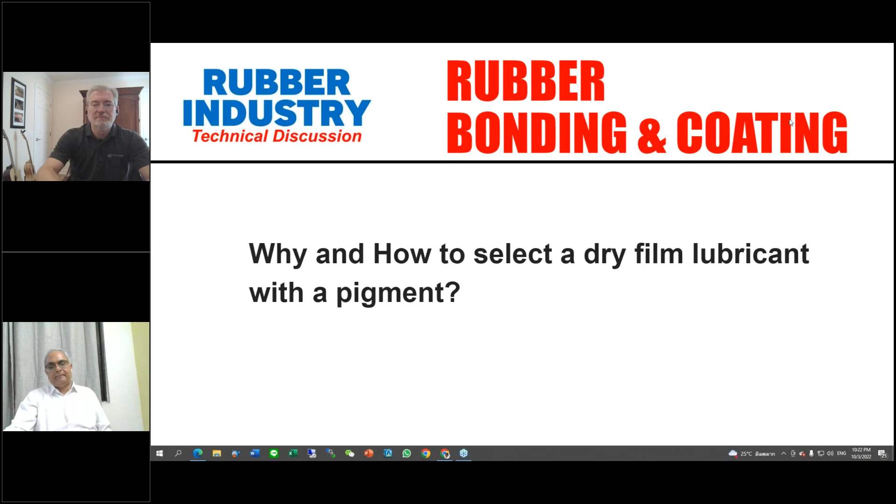That's a really good point. Every process, every coating process must start with a clean surface. I think Ravi did a great job in his presentation on dry lubricants, demonstrating the importance of cleanliness. Obviously, if there's contamination on your surface, when you go to bond to it, you will bond to the contamination instead of bonding to the surface. So surface cleaning is extremely important, and that applies in both bonding and overmolding applications and also in dry film lubricants. I spent less time talking about surface preparation, but it's extremely important. If your parts are dirty, your process will not perform and give you the outcomes you're looking for.

Absolutely, absolutely. Typically, I remember this kind of contamination. Because of contamination, bond failure was persistently happening with one of my customers. I remember this story from way back in 2004, 2005.

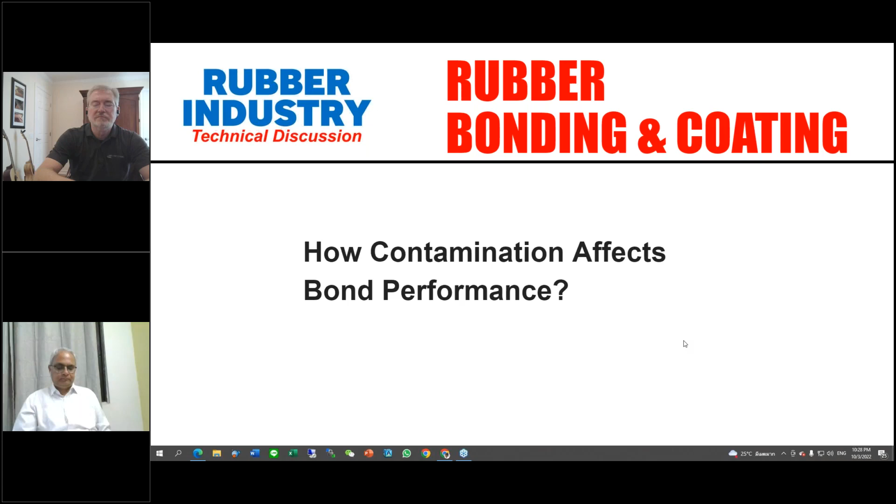This is in continuation with that actually, the cleaning process when we talk about it. Many times people just wash the components, or after doing the phosphating, they keep it for a longer period before doing the bonding. But they do not understand the impact of keeping it that way just for the sake of time. So the surrounding temperature is also part of the cleanliness aspect.

If I'm using the cleaning water before rinsing with hot rinsing and then doing the plain water rinsing, then probably I will be able to remove the very fine particles available, or the external bio particles which we cannot see with the naked eye, which can be taken care of by the temperature.

Also, agitation just by dipping the components is not going to help you out. By proper agitating and all, this component should be cleaned or washed before it goes into the next step. Obviously the chemistry, whether it's alkaline water or any salt has been added into that.

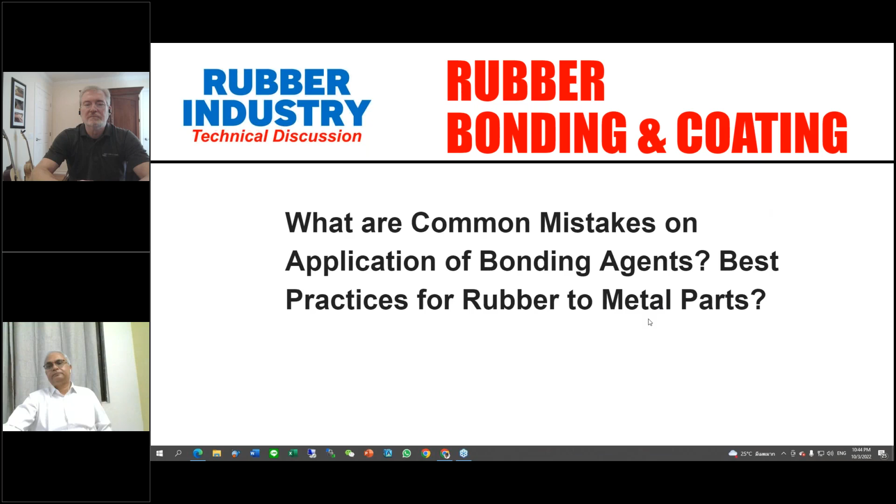Okay guys, that's the end of the discussion on rubber bonding and coating. Thank you very much, both of you, Michael and Ravi. We end this session here. Before we end, may I ask you to give your final remarks to the audience? Ravi, please go ahead first.

Yeah, this dry film lubrication is the need of the hour, and there are very few players available in the market. By choosing the appropriate method, getting more knowledge about this process, and choosing the right type of supplier, you will be in a position to enter this market effectively and efficiently, and capitalize on it to become among the top players in this process. If anyone would like more information or insight, you are welcome to get in touch with Mr. Peram, or through him, or you can contact me as well. Thank you, Ravi.

Michael? Well, I think it's interesting that we're covering two very different materials here, very different functions, and yet the importance of process and consistency is clear for both of them. So you need to pay attention to that.